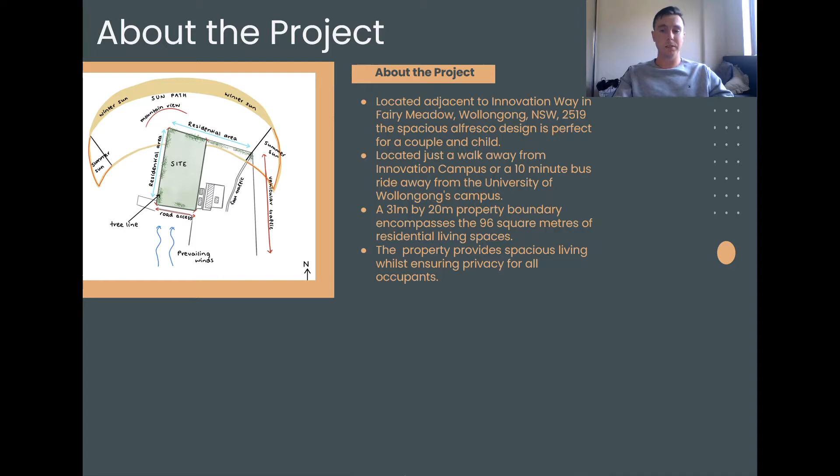The concept of net zero energy is becoming more and more vital in building and construction, and is an essential feature that must be catered for in the design. Located adjacent to Innovation Way, Fairy Meadow, the single-storey, two-bedroom residential property incorporates a strong net zero energy approach whilst still ensuring comfortable living for the occupant.

The building has been designed for a three-person household in which both adults are to be considered scholars. One of the adults is assumed to work from home and care for the child, whilst the other works at the University of Wollongong and visits the Innovation Campus frequently.

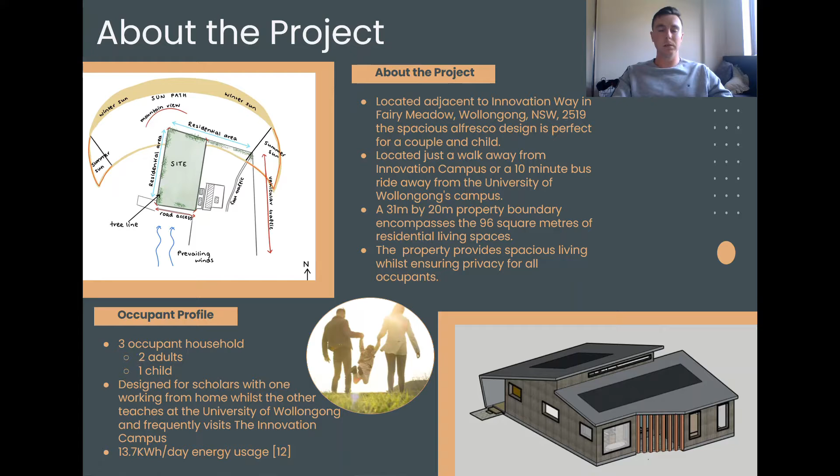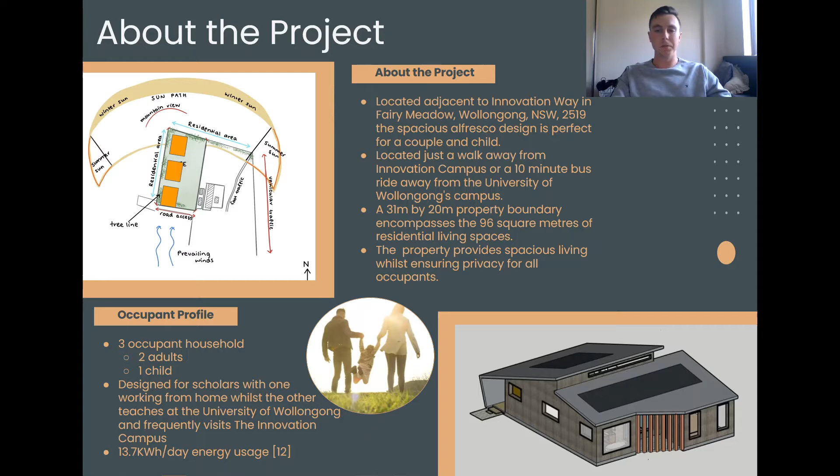The initial house will be located at the front of the proposed plot with access from Innovation Way. As seen in the figure, more lots can be subdivided for future developments and infrastructure. The existing residential properties have minimal effect on the proposed structure as the site boundary is delineated by trees and a fence.

The initial planning began with a bubble diagram in the early stages of the semester and was used to explore spatial relationships and the layout of a house. As weeks progressed, an initial floor plan was developed which highlighted various issues.

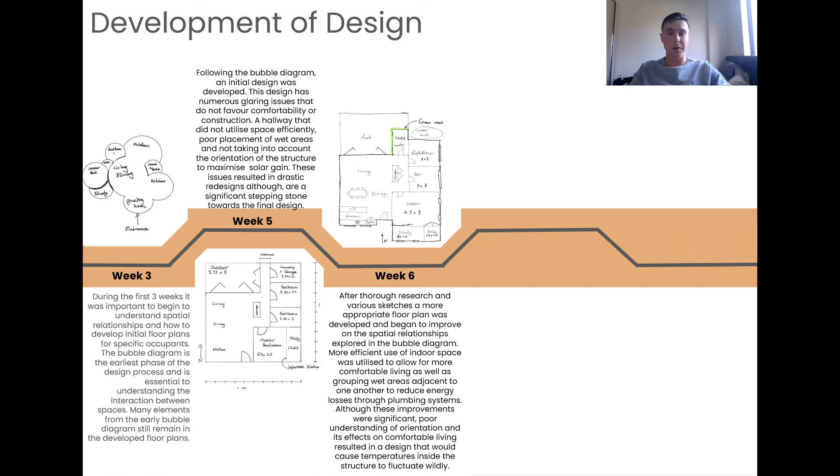The first floor plan accounted for the outdoor space within the 100 square metre limit, as well as having a poor layout. The week 6 floor plan significantly improved on this. However, privacy and orientation were not considered and needed further improvement.

With each iteration, various feedback was used to improve the floor plan, with various aspects remaining in the final design that were incorporated in earlier sketches.

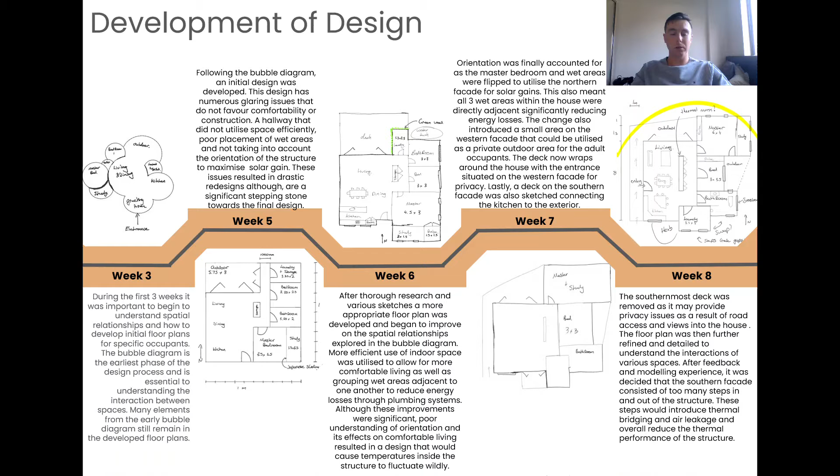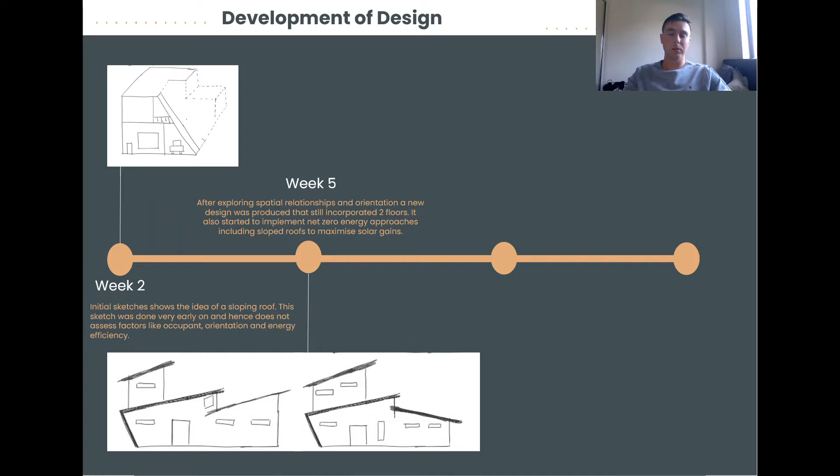Very early sketches were made with little knowledge of occupant or net zero energy design. The first few weeks of the elevation development were heavily focused on double-storey property. However, once the occupant profile was selected, the design moved to a single story to accommodate a family with a young child.

As seen in the sketches, the house had various iterations in which a final design was inspired by various research and properties around Wollongong.

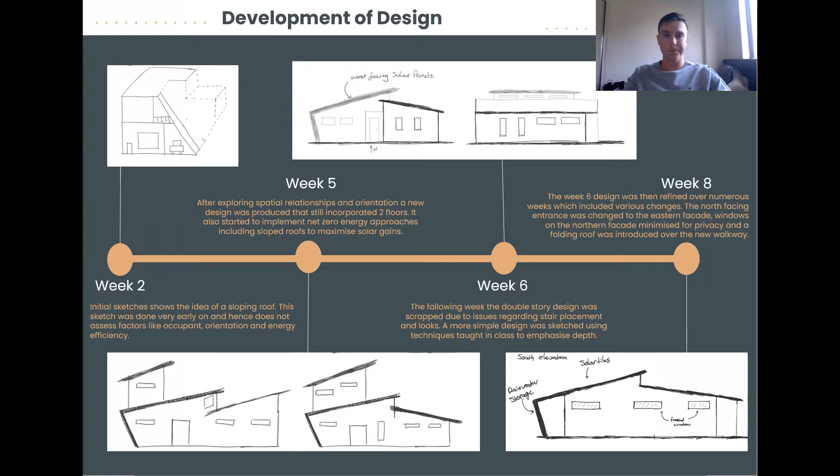A thermal mass wall will be used not only to improve thermal performance, but to also delineate the private spaces from the open living plan, as well as providing extra storage.

The alfresco design holds true to the Australian lifestyle and allows for connectivity throughout the house. The occupant profile inspired many design aspects of the house, including the study hidden away in the bedroom and the outdoor private area for the adults.

The 3 wet areas have all been placed within close proximity to allow for improved efficiency when moving water.

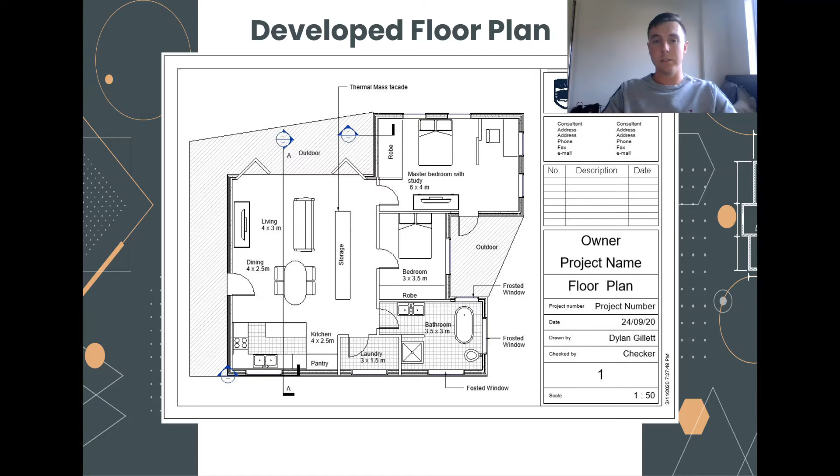Tractile solar panels will be split evenly on both sides of the roof to ensure enough energy is supplied in both the morning and the evening.

Studies show an average 3-person household uses 13.7 kilowatt hours per day, in which 50 tractile solar panels will generate 16.8. Below the tractile solar panels sits a vapour membrane followed by the earth wool insulation. Lastly, a layer of plywood binds the roof together and results in an R value of 5.62, which is much higher than the required 4.8 in New South Wales.

The wall is a significant factor to a structure's thermal performance. WeatherTex Self-Lock V-Groove has been chosen for the exterior finish and is followed by various layers that improve the house's thermal performance and results in an R value of 4.37.

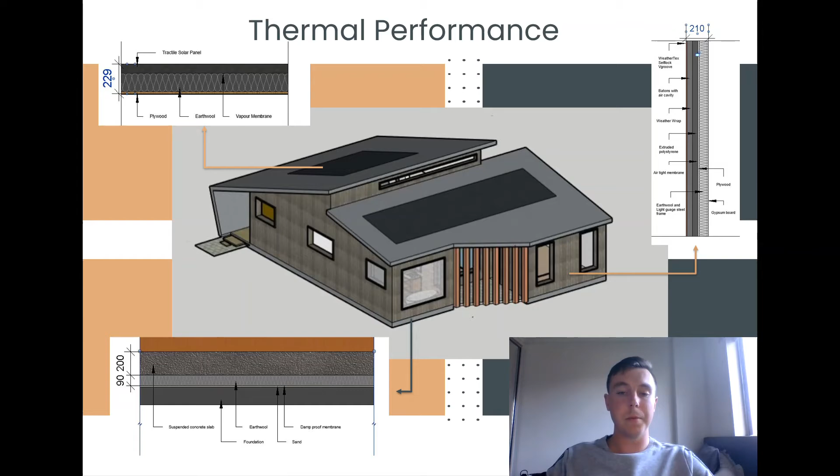A suspended slab has been chosen for the structure which incorporates fly ash and blast furnace slag. The slab will be insulated by earth wool and uses an inbuilt heating and cooling system to provide extra thermal comfort. As well as this, a global vapor membrane will encompass the entire structure to further the thermal performance.

Automated louvers on the western side will be connected to the property's centralized computer and will provide ventilation if a certain temperature is hit. These louvers will open up automatically and allow air to circulate inside the building, with the hot, stale air rising and exiting through the window at the top of the raked roof.

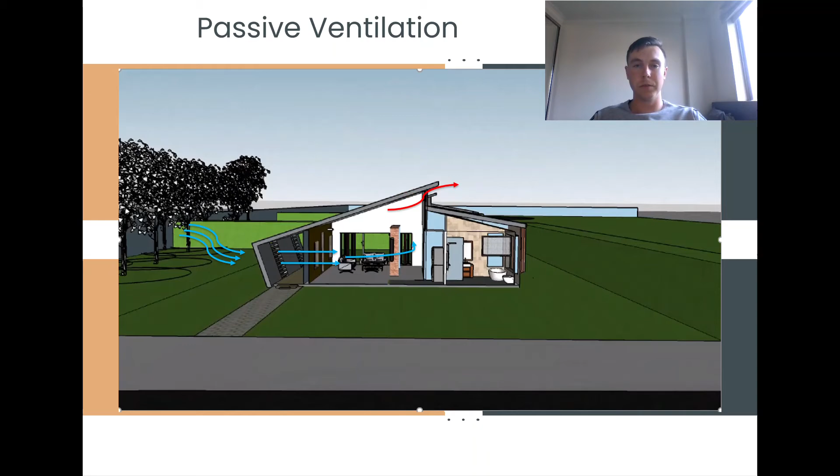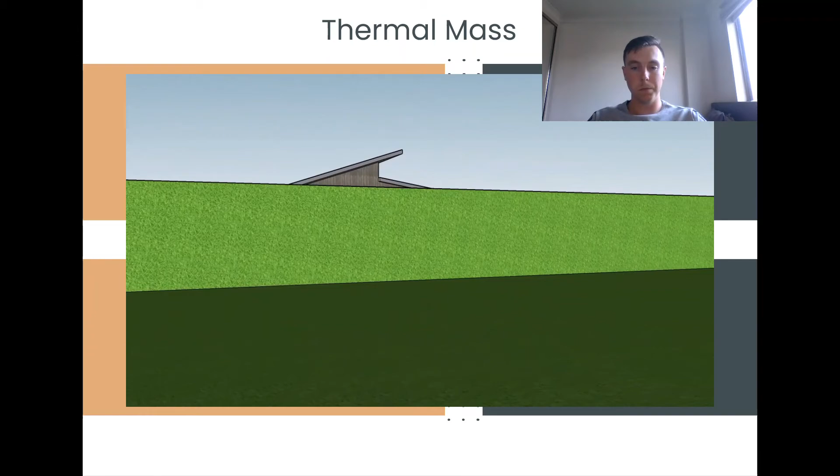As mentioned previously, a thermal mass facade will be incorporated within the property. During the winter, the low angle of the sun will allow light to penetrate and hit the wall, subsequently heating the structure. Whilst adversely, in summer, the eaves will prevent the sun from hitting the wall and be used to cool the structure.

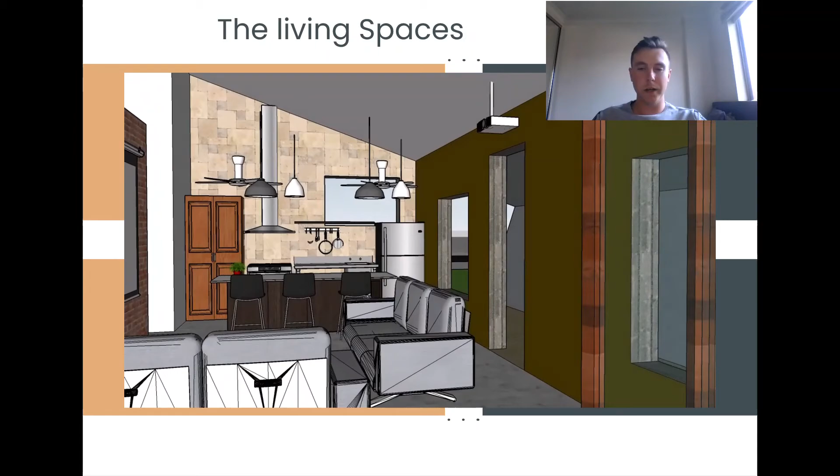The adjacent wet areas will use electronic thermostatic mixing valves to reduce excessive water consumption.

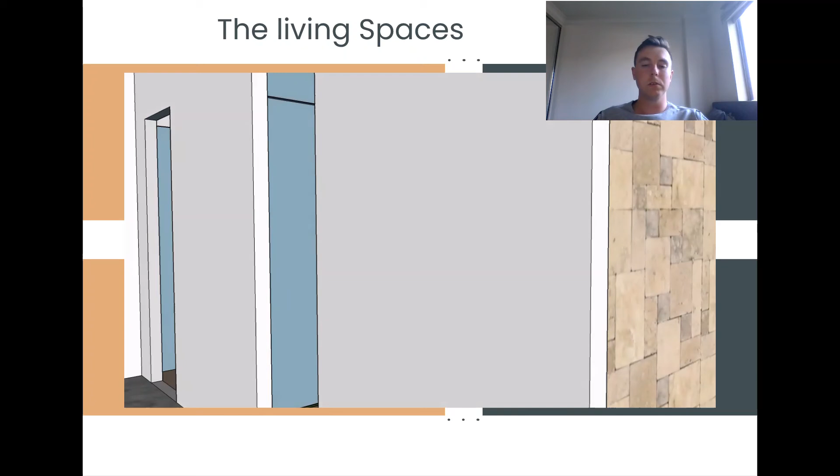Inspired by the desert rose, an air-to-water heat pump will be used to utilise the humid air around Wollongong. This will also be stored in a phase-change material tank that can reduce the peak loads of the heat pump.

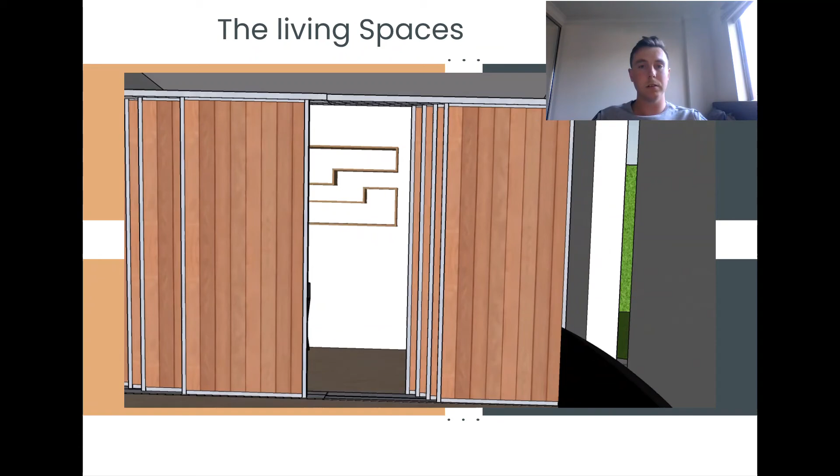To accompany this, an underground water tank will be used to capture stormwater from the roof, whilst the water captured by the tractile solar panels will be used as hot water or to heat the concrete flooring if necessary. All these aspects will be connected to the centralized computer and allow for superior energy efficiency and a pleasant living experience.